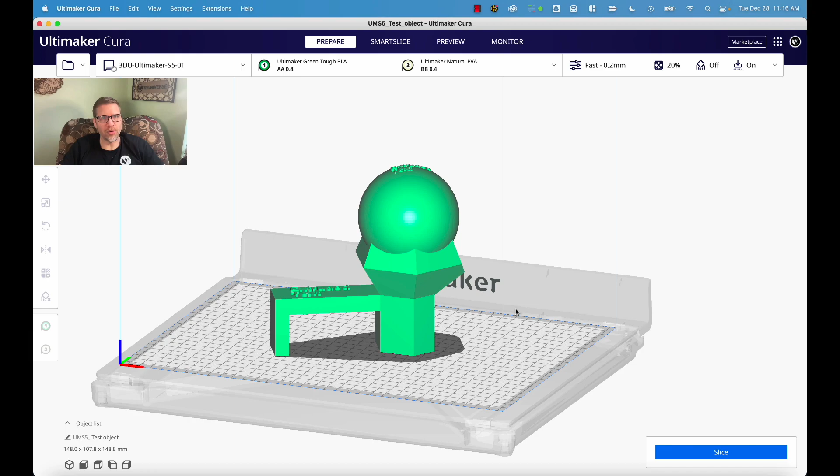I have here just a test object that I created real quick in Fusion, just so I could show some of these features. Just got different types of geometry here with some different sorts of overhangs, some flat surfaces, curved surfaces, some bridging, some extruded text, just stuff that'll show how some of these different settings can be used.

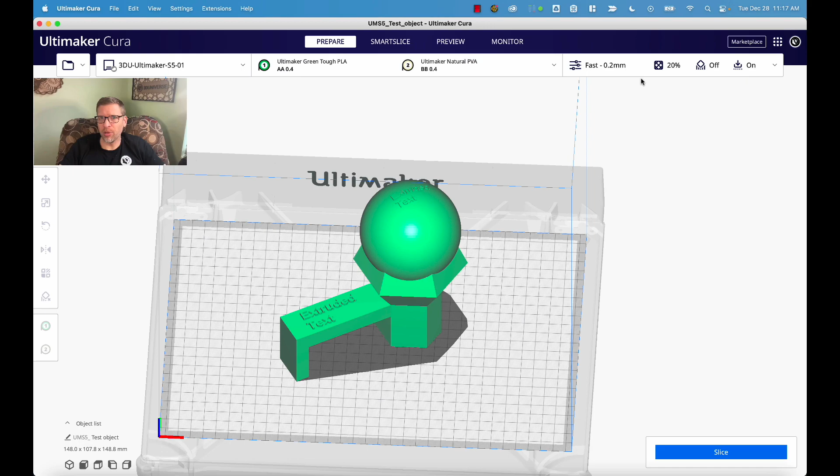So let's start with just some defaults. I've got this set up here for an Ultimaker S5 using 0.4 millimeter print cores, just using Tough PLA. And I'm going to start with just basic settings. So we'll slice just using the recommended mode, 0.2 millimeter layers, 20% infill. Don't need bed adhesion options here. Let's go ahead and just slice with defaults.

And we get an estimated print time of 13 hours, 39 minutes, using 186 grams of material at a cost of about $12.38. Now, those of you who have used Ultimaker printers already know that they err on the side of quality as opposed to speed with their settings by default. So there's a lot you can do to optimize things and get things to print more quickly without losing a whole lot on the quality side. And we're going to look at some of that here.

Now, let's say in this case we're more interested in speed than quality. There's always a sort of trade-off between the two, and there's no one right answer in terms of how to slice any given object. It's always a matter of finding the settings that most closely match what you're looking for, and it's going to be somewhere on that spectrum between the maximum speed and the maximum quality, depending on which of those is more important to you for a given print.

So in this case, let's say that we're more interested in speed than quality. And so the first thing that I would do is go to a larger nozzle. A larger nozzle is going to let you print things more quickly using thicker layers and wider lines, but it comes at the expense of quality, of being able to do finer details in your prints. So it depends on the specifics of your object.

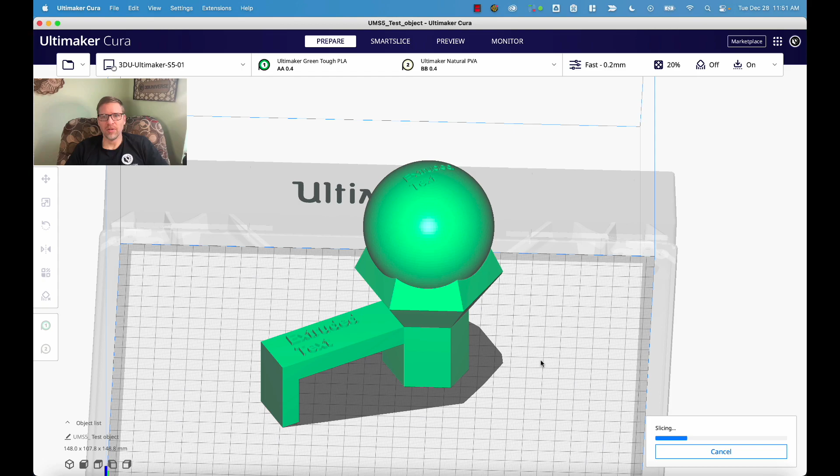Let's go ahead and slice this to give an example. So this is using a 0.4 millimeter nozzle. And if we go to the preview mode here, and we set our color scheme to material color, we'll see that everything looks nice, prints nicely, including that extruded text on top there. No problems at all. And that is where you'll see a difference.

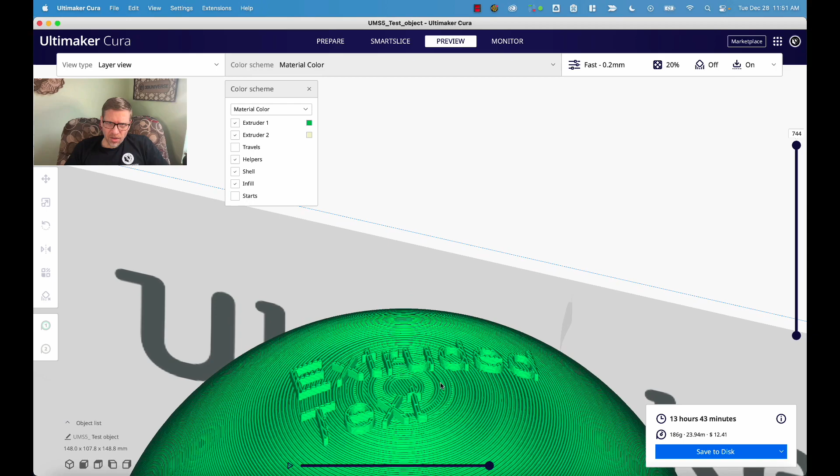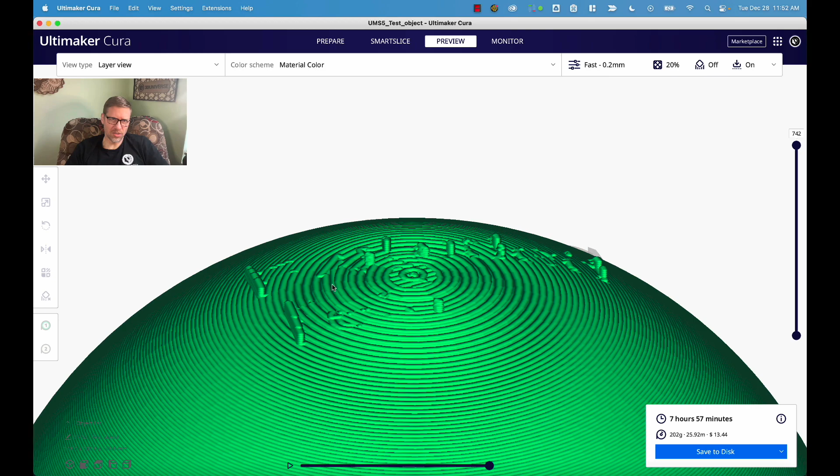If I change now to a 0.8 millimeter nozzle and reslice and go to preview mode, you'll see that that top extruded text really kind of falls apart. It just is too thin for the nozzle to be able to extrude those lines because the lines of the text are thinner than the 0.8 millimeter nozzle that we're using.

Now you could adjust your line width to try to get it to print those sorts of details, but that's not the ideal approach. Down here you can see that it is printing this text okay because that's a larger, thicker text, and it was able to handle that, but that text on top did not come through.

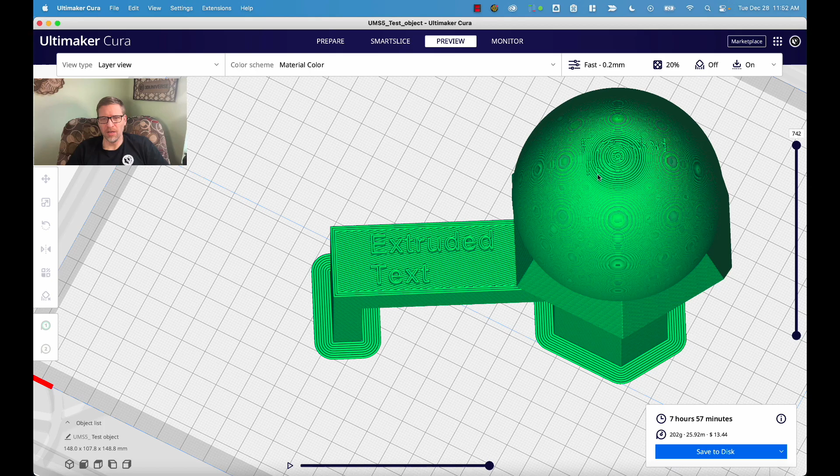So just be aware of that trade-off, that you will lose some of the very fine details where it comes to things sticking up out of your object that need to be extruded by the width of the nozzle. If you increase your nozzle size, you do two things. Number one, you increase the line width, which is going to speed up each individual layer, and you can also increase the layer thickness, which is going to reduce the number of layers that need to be printed. As a general rule, your layer thickness can be up to about 75% of your nozzle diameter. That's not a hard and fast rule.

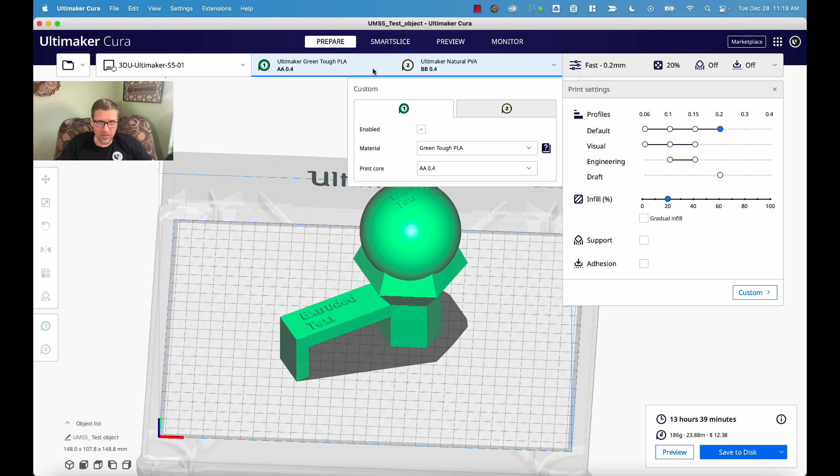You can go thicker even by increasing your temperature to get a better flow rate, things like that. But as a general rule, let's say 75% of nozzle diameter. So with a 0.4 millimeter nozzle, our layers can be up to about 0.3 millimeters thick. If I change that to a 0.8 millimeter nozzle, now our layers can be up to 0.6 millimeters thick, and we have half as many layers. We also have wider lines, so that means each layer can be done more quickly.

So let's go ahead and do that. Let's change it to a 0.8 millimeter nozzle, and let's start to customize some of our other settings here. But before I do that, I'll just reslice, changing nothing but the nozzle size. And already we see that our estimated print time is down to 7 hours, 57 minutes. So it's a significant time savings already.

But let's go further. I'm going to go into the custom mode now. This is where most of you will be working if you're more advanced with settings. This is where you can really get full control. Now, by the way, I should mention I've got all settings being shown here. If you're not seeing this, right up here, this little hamburger icon lets you select what you're seeing in settings visibility. Basic is just going to show the basic settings. Advanced shows more. Expert shows even more. And all, which I'm looking at here, shows everything.

If you want, you can go into Manage Setting Visibility, and that's where you can really fine-tune which settings are showing, and you can show or hide each individual setting to your liking. For right now, I've got all of them turned on. First thing I'll do is change the layer height. Let's go up to a thicker layer. I'm going to go to 0.35 here.

And there's a reason that I'm going to that. I could go even a little thicker. Like I said, I could go up to 0.6, but I'm setting it at kind of a midpoint because of a feature I'm going to show you shortly called adaptive layers. I'll explain that shortly, but for right now, I'll set the layer height at 0.35. And let's just slice again to see what that does using a layer height of 0.35 throughout. And you can see that already reduced our time further down to 4 hours, 59 minutes.

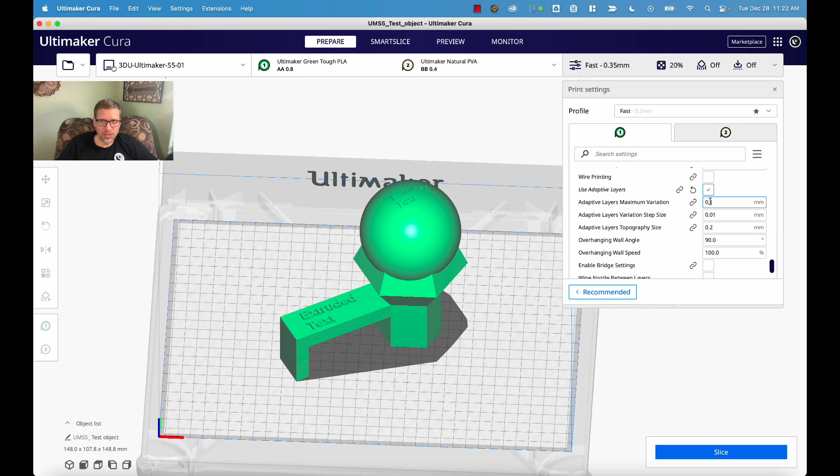Adaptive layers maximum variation means how much you can vary the layer height either up or down from your base layer height. So if you recall, we set our base layer height to 0.35 millimeters. What I'm going to do is set this value to 0.25, and what that means is the layer height will be allowed to vary up to 0.6 millimeters and down to 0.1 millimeters because it can go 0.25 millimeters in either direction from what I have set as the base layer height. The next setting is adaptive layers variation step size.

So from each layer to the next, this specifies how much the layer height can change. Now, currently it's set to 0.01, which means it's only going to change each layer by 0.01 millimeters. I want to let it change a little bit more quickly than that, so I'm going to go to 0.05 here. That means it can go from 0.25 millimeters on one layer, it can go to 0.3 millimeters on the next, and then 0.35 millimeters on the one after that, and so on.

The third setting here is adaptive layers topography size. What this means is how much distance is there from the edge of one layer to the edge of the next layer. So think about a slanting surface where the layers become more visible. How close do you want the edges of each layer to be? That's going to determine how thin the layers need to get in order to achieve that setting.

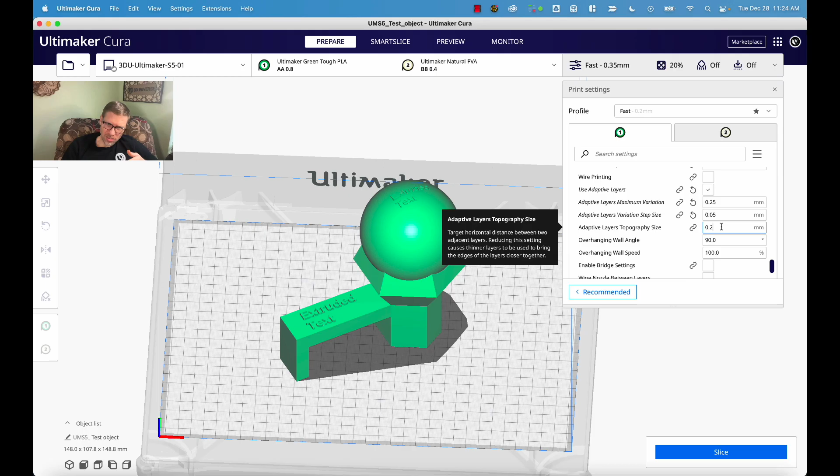So by having it set at 0.2 millimeters, that means that the very edge of one layer, like if we looked at these slanted surfaces here, the very edge of one of these layers can be 0.2 millimeters away from the edge of the next layer. So I'm going to leave it at that for now, and we'll move on. So those are the 3 settings for adaptive layers.

Okay, so another setting that we have here is overhanging wall angle and speed. What this is useful for is slowing down the print speed on areas where there are overhangs. Like if you look at these slanted surfaces here, you're going to get a cleaner surface if you go a little bit slower on those overhanging walls. And so what we can do is specify an angle and a speed reduction for that. So there's 2 settings here.

The first one is the overhanging wall angle. And what this means is any walls that are overhanging more than this angle are going to be treated as overhanging walls. The default is 90 degrees. Now, it's impossible to overhang more than 90 degrees. So what that basically is doing is disabling this setting. Okay, if you have a 90-degree overhang, that means you have a horizontal surface and you can't get any more than that.

So if I reduce this to, say, 20 degrees, that now means that any wall that's overhanging more than 20 degrees, which would include all of these slanted surfaces here, those are going to be treated as overhanging walls. And this next setting will then apply. So let's say that we want to reduce those by half, so we'll make this setting 50%. Now that means that any of these overhangs that are more than 20-degree overhangs are going to be printed at half of the speed of the rest of the print.

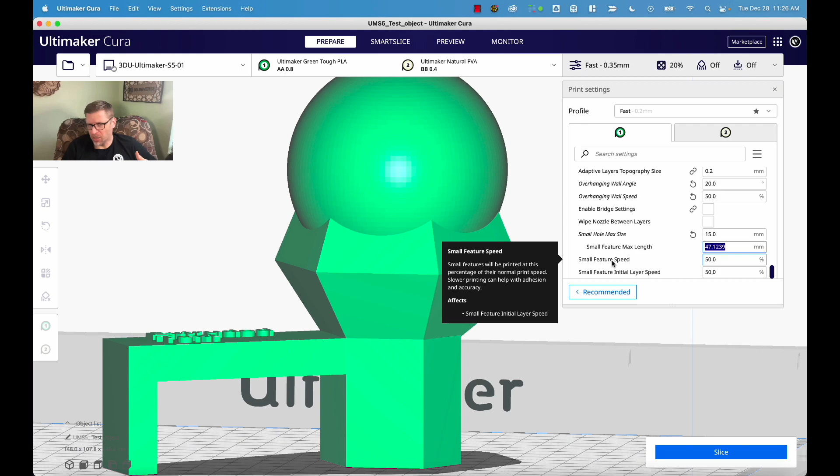Moving on down here, another one that you'll want to be aware of is this small feature set of settings here. So small hole max size is basically the size of a feature that's considered small. So anything less than this size is going to be considered a small feature. So let's say small holes of less than, I'm going to go 15 millimeters here, so that anything that's even remotely small is going to result in these settings down here being applied, which is again a reduction in speed. Small feature speed, 50%. Small feature initial layer speed, also 50%. I'm just going to leave those the way they are, and we can see what that does here.

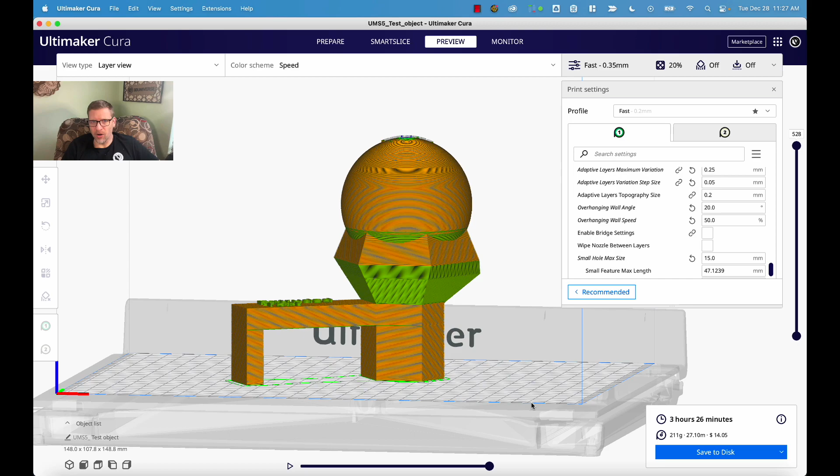I'm going to go ahead and slice with these settings and see what we have here. And I'm going to go back into our preview mode here so that we can see what's going on. Right now, I'm using the speed color scheme, which is very helpful for seeing how our speed is changing throughout the print. And what you're seeing is a couple of things. Let's scroll down through our layers here, all the way down to layer 1.

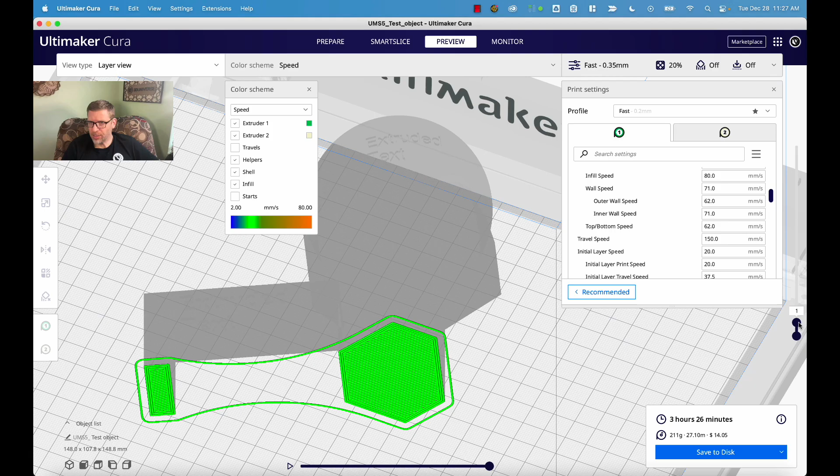Starting at layer 1, we've got this bright green color, which looks like it's a rather slow speed. Okay, well that's, if we scroll up to our speed settings here, that's because our initial layer speed is 20 millimeters per second. That's to be expected. As we keep going there, we've got this orange color, which is our maximum print speed of 80 millimeters per second.

But then if we scroll up further, we see some different speeds. Number one, the lettering. Okay, why is that lettering going slower? Well, because of that small feature setting that we used way down under experimental. If we turn off that feature setting there, we go back to 0 for the small feature size and we reslice, you're going to see that that extruded text is back to orange.

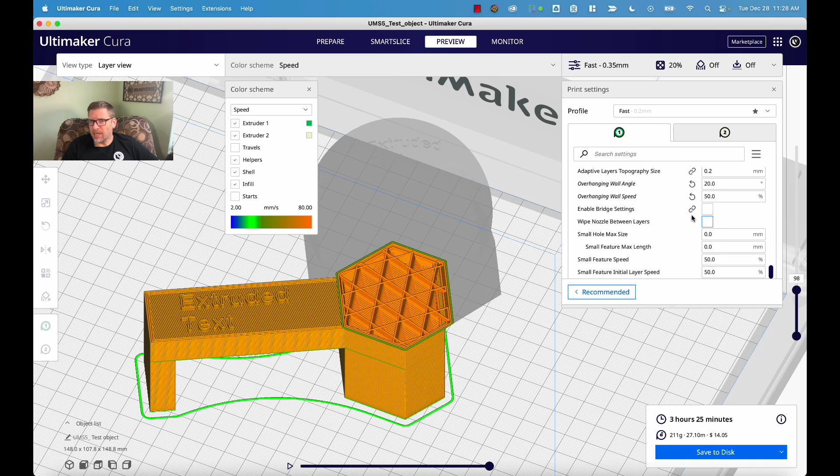So it's trying to print that at the maximum speed. And it's probably going to look a little bit sloppy as a result. So that's what that small feature setting is doing. I'm going to put it back to 15 millimeter max hole size. And then those settings should be reapplied. If I slice now again, you'll see that that text is now in a green, which means that it's printing at half speed, about 40 millimeters per second.

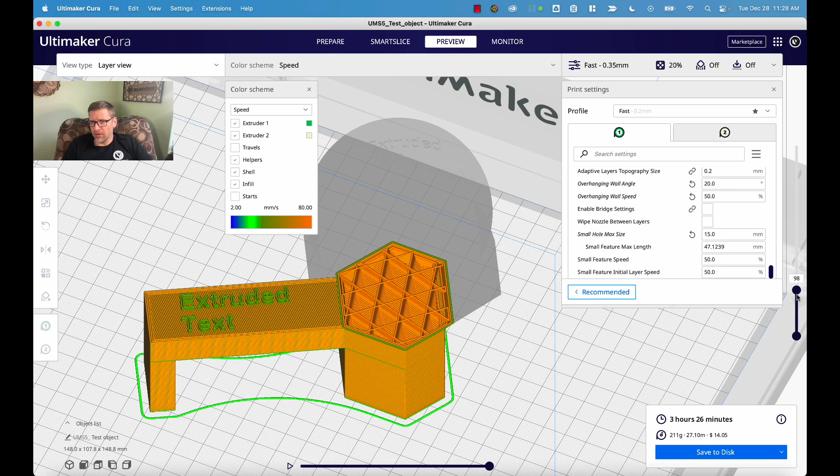Scrolling up through some of these other layers, you're going to see that the same thing is being done with our walls here, the slanted walls, and that's because of these overhang settings we had here. Those walls are more than a 20-degree overhang, and therefore they're being considered overhanging walls, and they're being printed at 50% speed. But that only affects the walls, so the interior is still being printed at 80 millimeters per second.

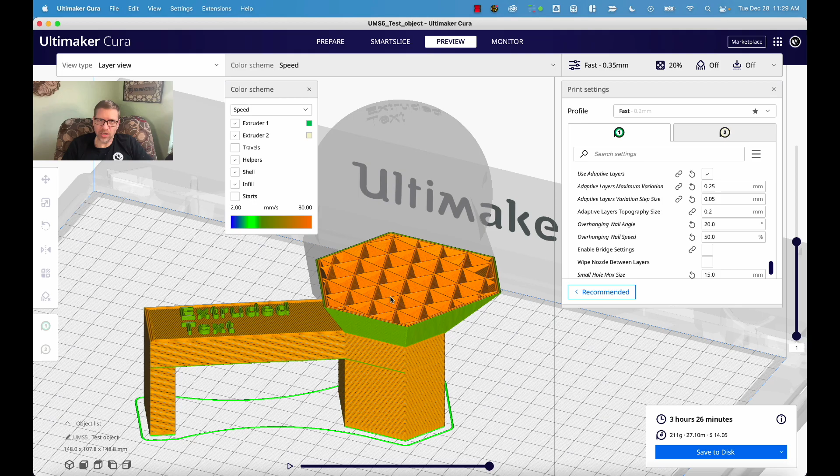Now, keep going. You're going to see that similarly, the curved surface down here at the bottom had those overhang settings applied. There's a little bit of an outward overhang there, so that got slowed down. And then way at the tippy top of the print, the last couple of layers got slowed down just because of the minimum layer time setting. It's trying to not print those layers too quickly. It needs to give the material time to cool, so it's slowed down for that.

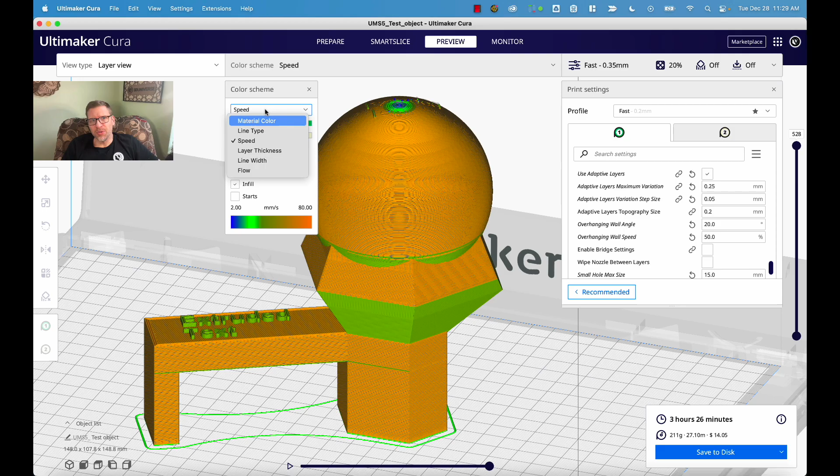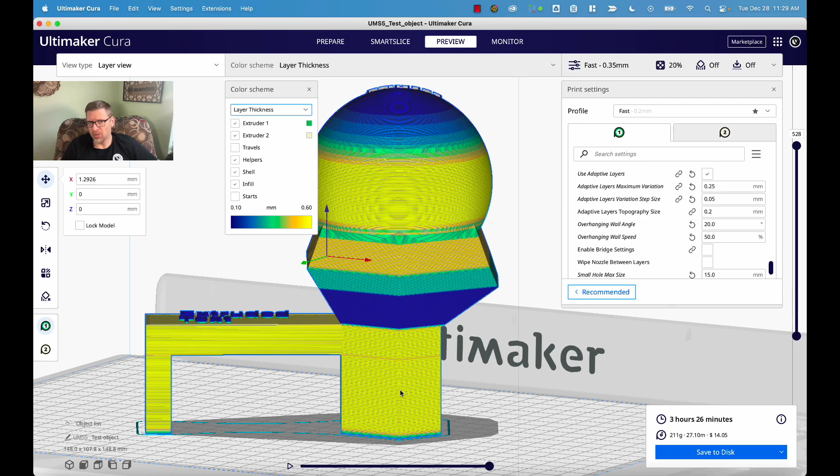Now, let's change to layer thickness in our color scheme view here. And now we see something interesting. We see that the layer thickness is changing throughout the print. And that's because of our adaptive layer settings. So what we see is down here at the bottom, where it's pretty flat walls, there's nothing fancy happening, it's doing the thickest layers possible. The yellow there is 0.6 millimeters. So we're getting the best speed that we can because you're not going to see those layers much anyway because they're being stacked right on top of each other neatly.

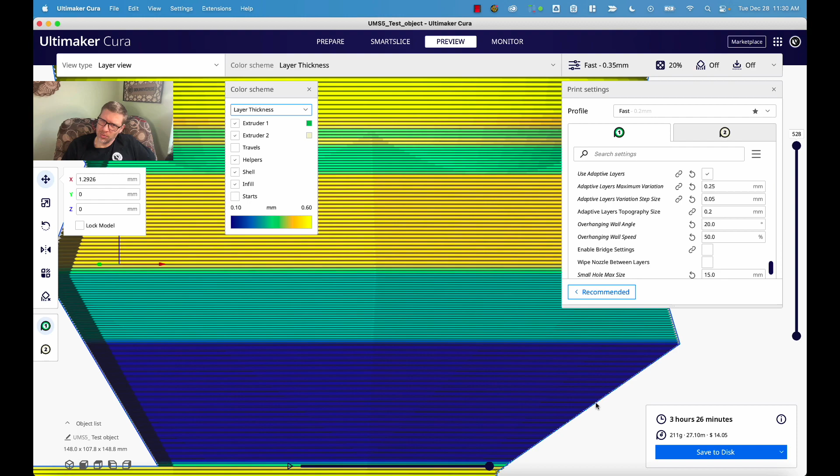But then when we get into this area where you have the slanted overhangs, it pulls way back on the layer height, goes all the way down to 0.1 millimeters, so it's using the thinnest layers possible, and that's because of this overhang over here where it's really got a steep outward overhang, and it wants to give us the smallest sort of step size possible, and so it's using 0.1 millimeter layers.

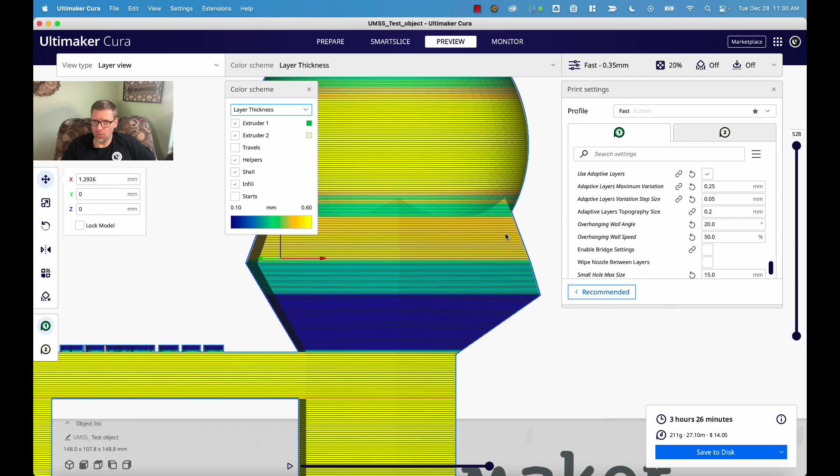Then once it gets past that steep outward overhang, this part in here, it's still got overhangs, but they're not as steep, so it's going with this middle kind of 0.4 or so millimeter layer height. And then as you can see past that in the yellow, it goes back to thicker layers because there's no more overhangs. And so it's adjusting this throughout the print as needed.

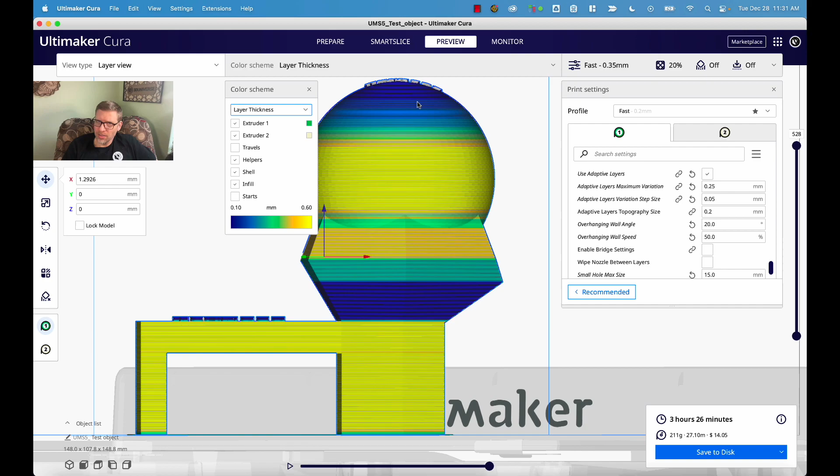When it gets into the spherical part, the middle section here, it's using real thick layers because there's not much curvature there. And then as soon as that curvature starts to increase, you can see that it gradually reduces the layer thickness, getting thinner and thinner and thinner, so that you get the best quality possible where you need it, and thicker layers where you don't need that, where it's not going to be visible. So this really gives us a nice trade-off, and you can see that our print time now is down to 3 hours, 26 minutes. So you're getting a really nice balance between speed and quality in this case.

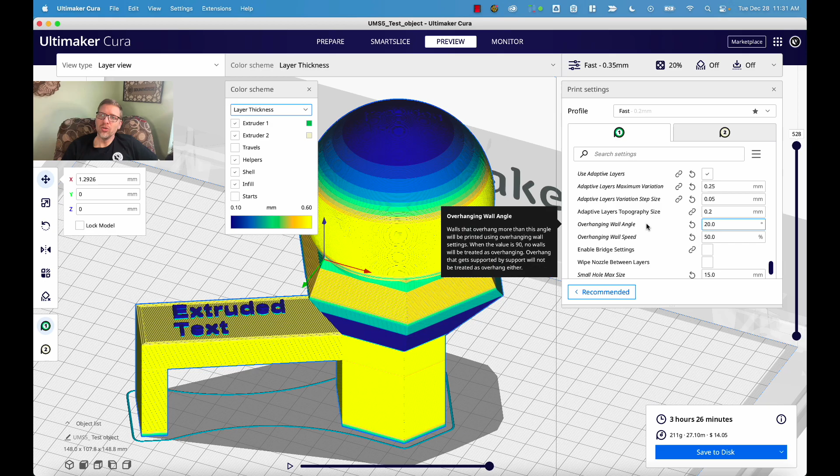And if you wanted to skew it more towards quality or more towards speed, you can do that by adjusting these settings. So you might adjust your adaptive layers settings here so that you skew it more towards thicker layers. You might adjust your base speed, go even higher than 80 for your base speed, and then pull it back from there where needed. There's a lot of things that you can do to sort of fine-tune things here, but those are the basics of how you can get control over your layer thickness and your print speeds using some of the settings that are available here.

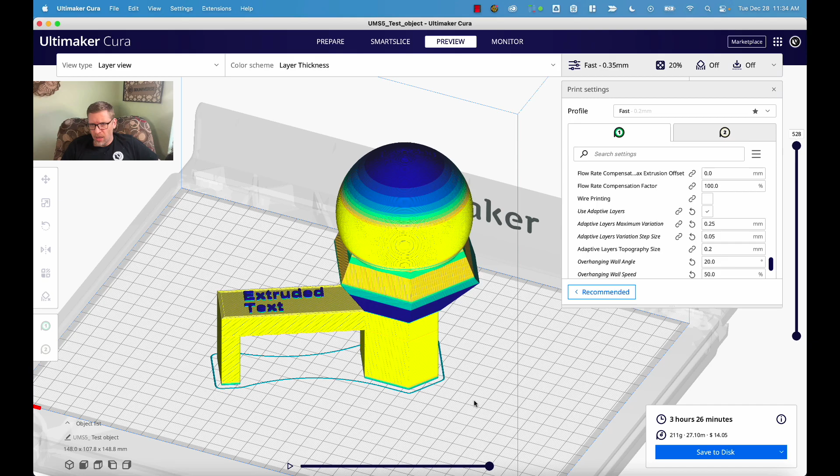All right, so now that we've gotten a pretty good print time on this print, there's something else I want to show you, and that is bridging. So if we look at this bridge that's being printed down here in the preview mode, we see something interesting. Look at how that bridge is being printed. Look at the direction of those layers. We can see it more easily if I scroll down to those.

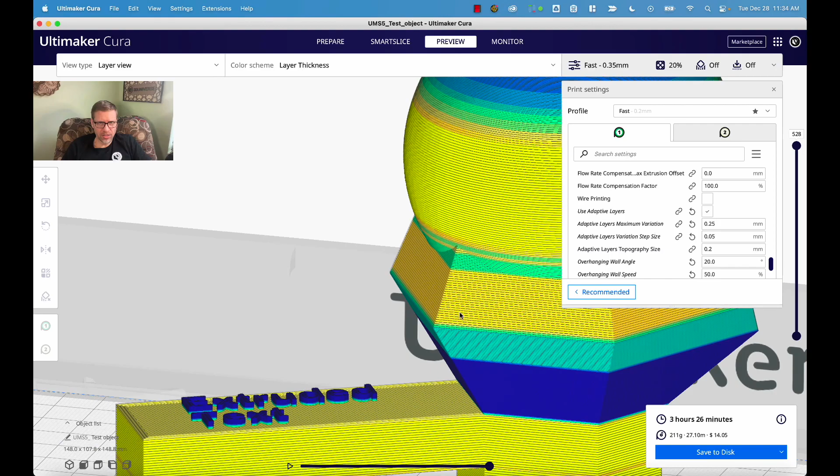I'm going to go back to a top view here, pan around a bit, and now let's scroll down to exactly that layer. Let's see, now that's layer 60, yep, layer 60 there. And then we can actually use this horizontal scroll bar to animate that layer. So look what's happening. It's going to try to draw the outer walls, which is going to be okay. It can bridge that gap. Okay, you're going to have those two strands there.

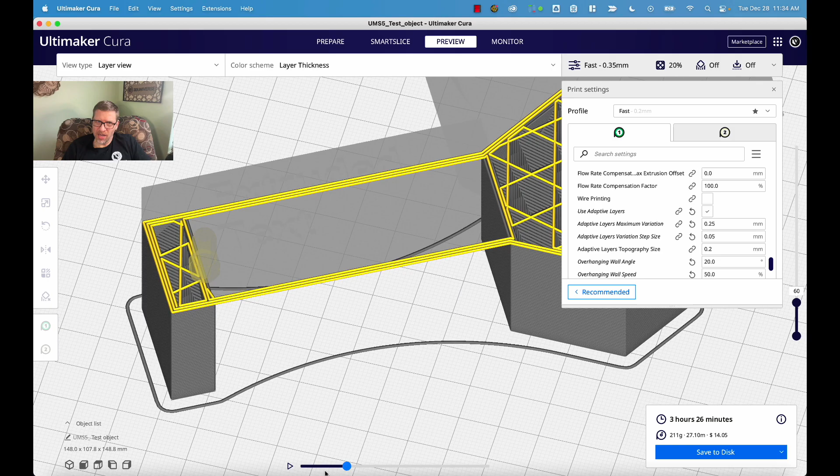But now it's going to try to print across those strands at this angle, and that is just not going to work very well. It's trying to sort of connect up at each end there, going back and forth, and you're going to end up with a very messy bottom surface doing it that way.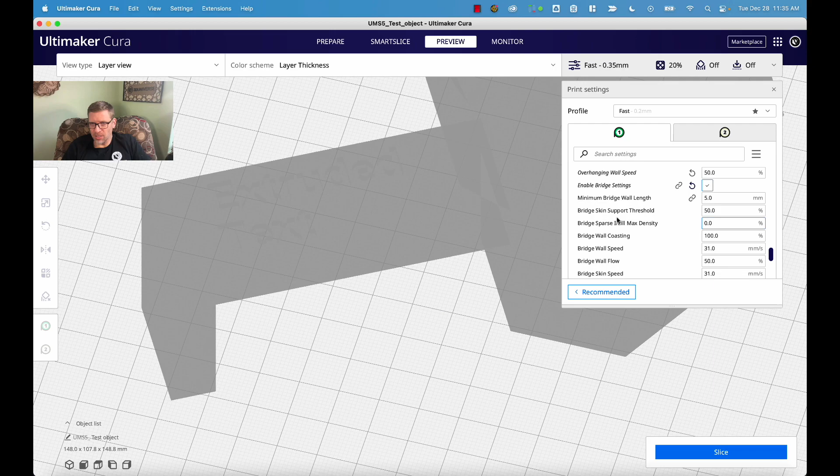If, however, under this experimental settings section, we enable the bridge detection, enable bridge settings here, I'm not going to mess with any of the settings down here because I found that the defaults work pretty well. You can tailor all these settings if you like, but I'm going to leave them on defaults. Just by doing that one thing, enabling bridge settings and reslicing,

look what happened. That exact same layer is now being printed the way we want it to be printed, going back and forth, connecting up at either end. We're going to get a nice clean bridge that way, and then building up from there, it's going to start going across and then alternating directions. And that's exactly what we want to see. You're going to get a much cleaner lower surface on that bridge.

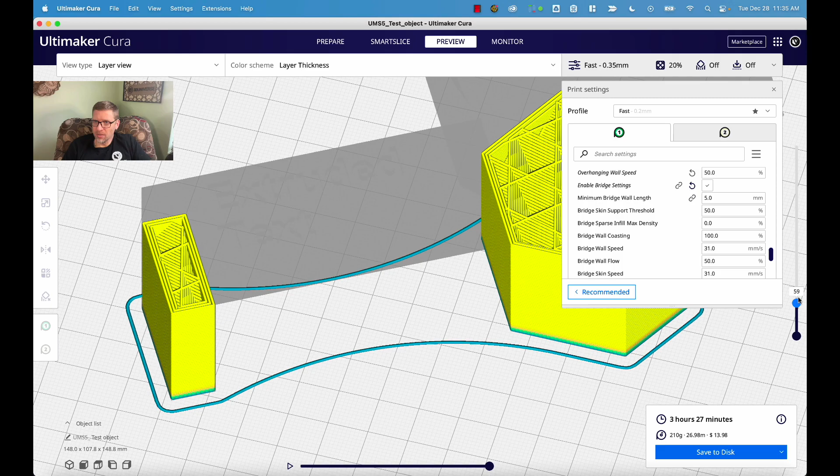I'll go back up to layer 60 here. There we go. So that's going to give us a much nicer result on a bridge. So if you have areas of your print that you know are best handled with bridging, enable that here under experimental settings and you'll get a much nicer result.

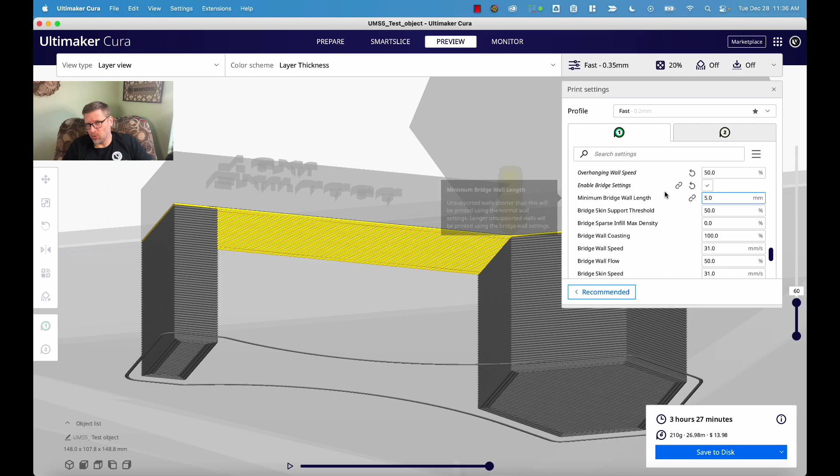Okay, so now we've got a pretty good set of settings here. We've got our print time down to just under 3.5 hours, but let's say I want to customize things further. Maybe there's certain things that I want to do in parts of my object that are different than other parts of the object, and you can't do that using the global settings over here so well. Well, you've got two other very powerful tool sets at your disposal in Cura, and I'll show you those here.

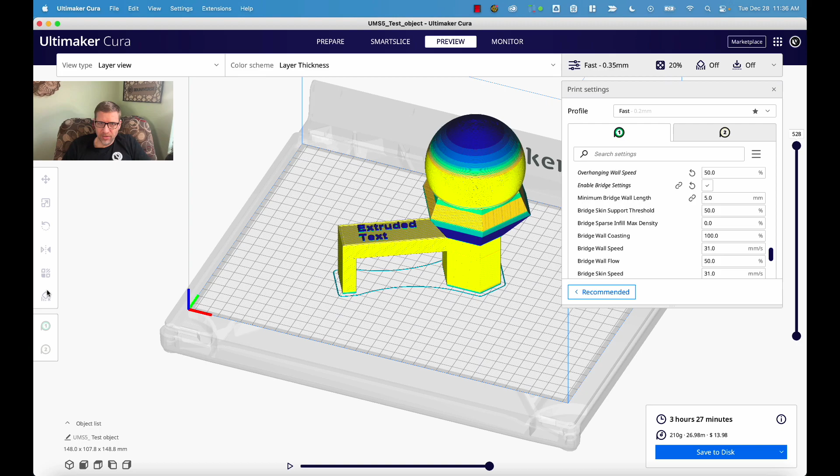Number one is something that's based off of the support blocker tool. So let me go back to prepare mode here, and you have to select your object first. Notice that you don't get these tools until you have an object selected. So select our object. Now I go over here in the toolbar, and I'm going to select this support blocker here. Now, usually this is used for blocking supports, just as the name suggests.

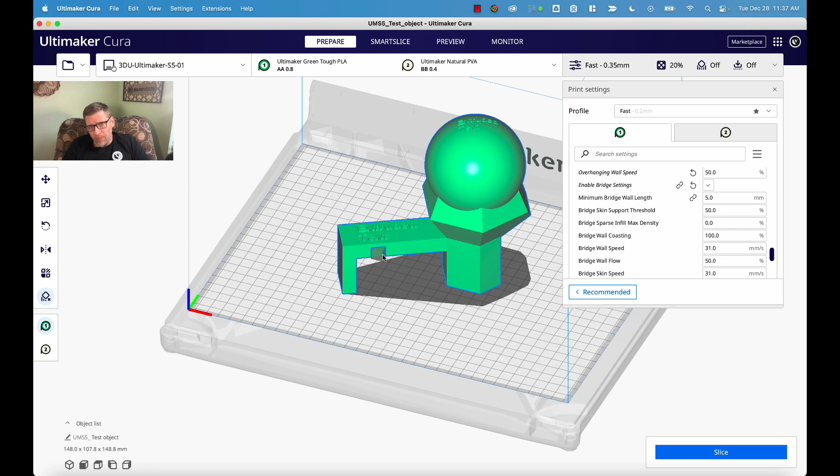So if I drop this in here just by clicking somewhere in my object, that just drops a little cube there, which I then have to manipulate by first deselecting my object. Because right now you might notice that both my object and the support blocker are selected. So let's just click out here to deselect everything.

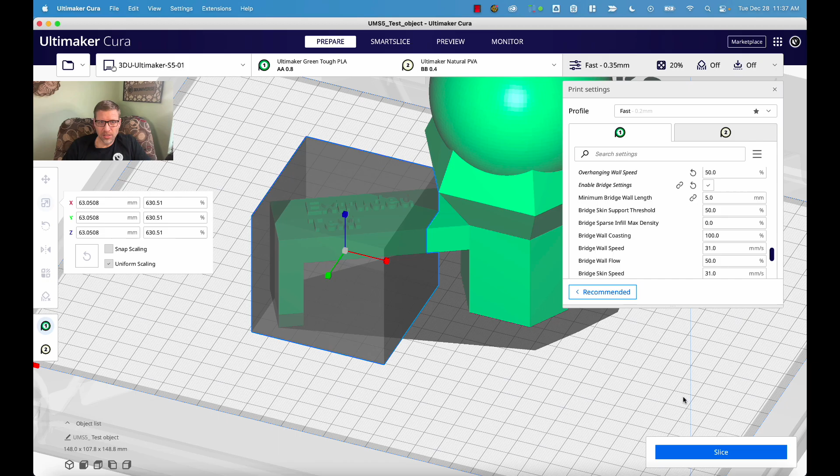And now if I click back on that support blocker just to select it, I can now manipulate that object just like anything else. So let's scale it, make it bigger so I can actually do something with it. Maybe we'll rotate it a bit so that it's oriented like this part of the object. We can move it around. Let's put it so that it's just kind of overlapping this end here.

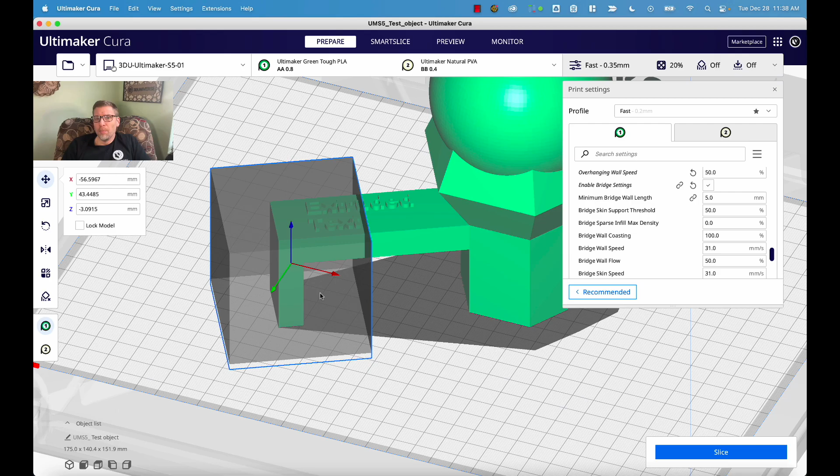And so by default, this object would do just as the name suggests. It would block supports. So if I enabled supports for this print here, we'll do that now just so you can see. We'll go ahead and turn on supports. And we'll slice.

And if we go to preview mode, you'll see that we now have supports under there, but we don't have supports under here because of the support blocker. Okay, so that's how the support blocker works. But we can also use that support blocker in different ways. So I'm going to turn off supports, so we don't need them for this print.

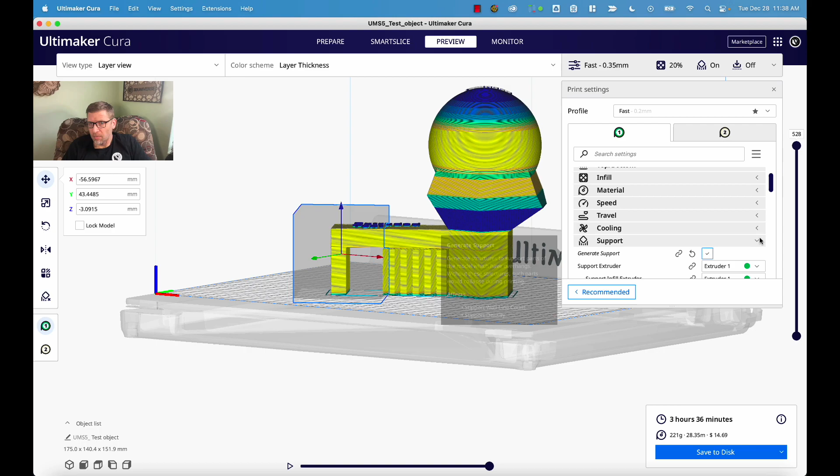And now we can go back to that support blocker object. And over here on the toolbar, the next one up is called Per Model Settings. And if you click on that, you'll see that it's defaulting to Don't Support Overlaps, which is what gives it that support blocking function. But you can change that to say Modify Settings for Overlaps, Print as Support, or Normal Model.

So normal model would just mean that you're going to print it as a model. It's going to print solid. We don't want that. Print as support means that that whole area will get printed in as support, which also is not very useful in my mind. But this one here is quite useful, this one that says modify settings for overlaps. That lets you modify that region of your printed object that overlaps with this.

And you can only modify certain settings this way, but there are quite a few. So you can modify the infill mesh only, which is only going to modify the interior of your object. Or you can choose cutting mesh, which is going to modify everything that is overlapped, including the walls and the interior. So choose one of those options, and then you can select your settings. Now, not all of the settings are available here, but quite a few are.

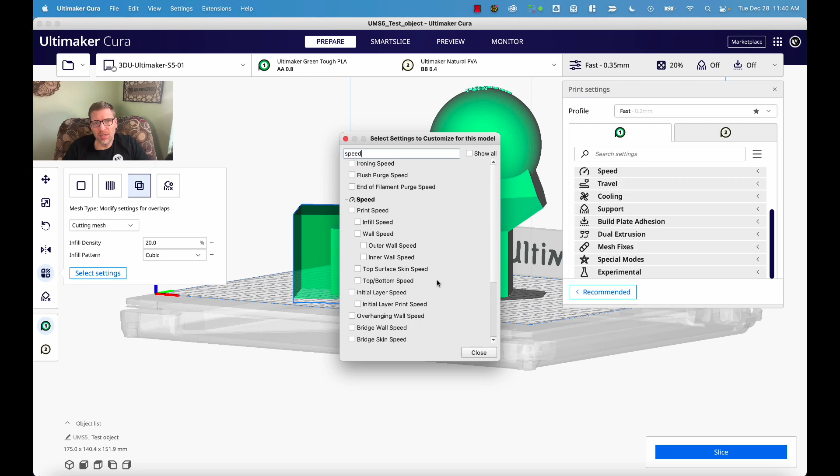So for example, you can change your, let's see, infill. Maybe I want to have more infill. Sometimes it's hard to find. You can just type up here, infill density. Maybe I want to change the infill pattern too. Maybe I want to change the speed for the walls. A lot of different settings you can change. So choose the ones that you want.

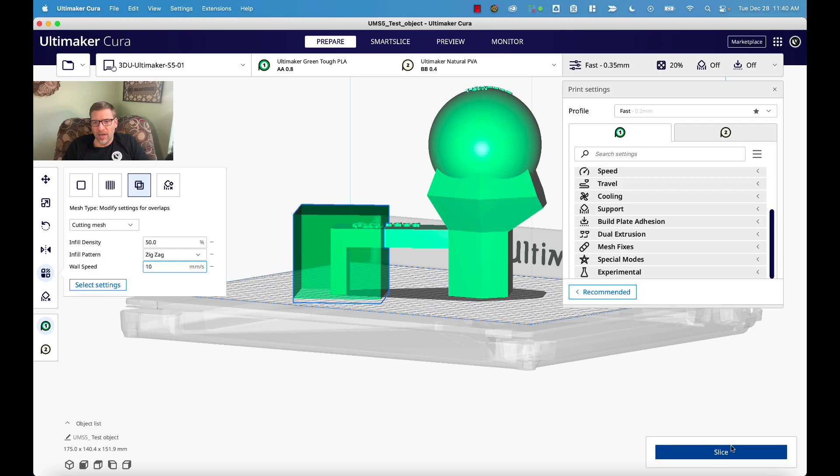And let's say over here, infill density, instead of 20%, I want 50% infill for this region. And let's change it from cubic to, oh, I don't know, we'll do zigzag infill pattern. And let's say we want the walls to go really slow here, all the way down to 10 millimeters per second. And now if I slice and preview, what you're going to see when we scroll down through those parts of the layers, let's change our color scheme to speeds.

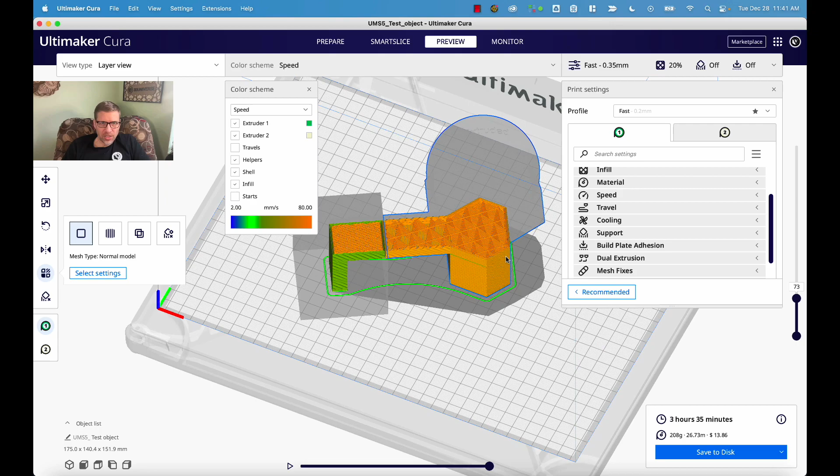So you can immediately see that that whole section over there, the walls, are being printed much more slowly. If I scroll down a little bit more, you'll see that. So the interior is still being printed at the full 80 millimeters per second, but those walls are cut way back based upon the settings that we specified for that custom region.

The other thing that you can see is the infill density. Notice that that is a much denser infill. That's a 50% infill compared to 20% everywhere else. So it is modifying those settings that we specified only for that area, and that is a very powerful way of customizing different parts of your prints.

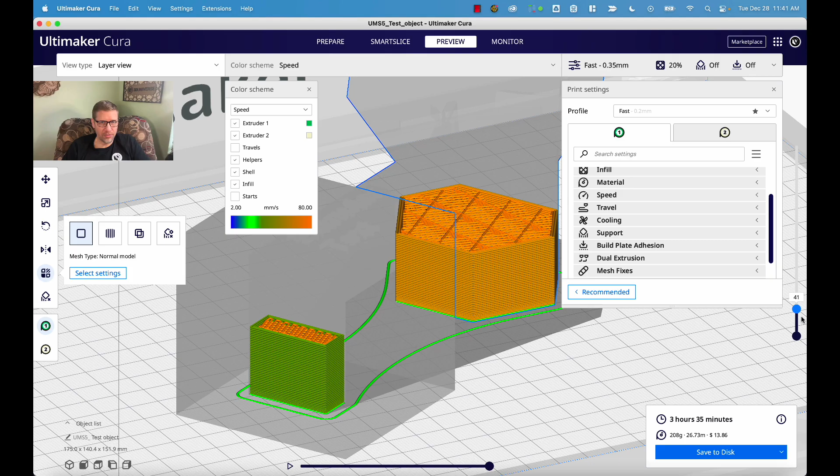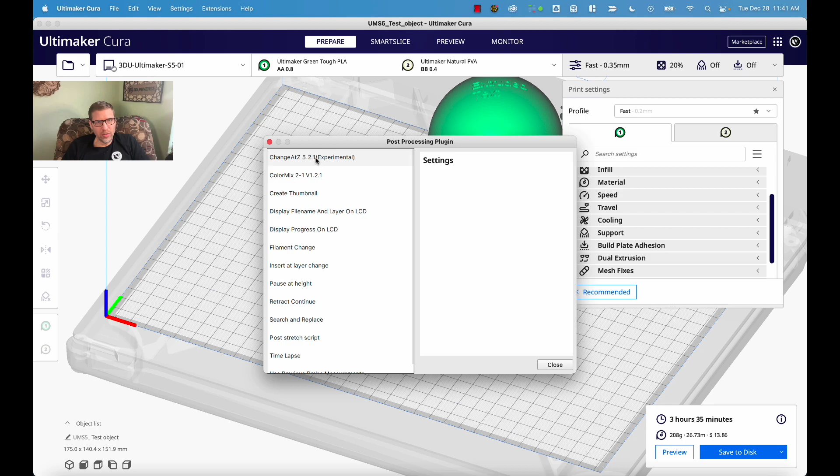Another option that you have is something that you'll find under the Extensions menu, Post-Processing, Modify G-Code. And what you can do here is add a script, and there are a number of options here, several of which are quite useful, but I'm only going to show you this one here, ChangeAtZ. And what this does is it allows you to change certain settings at specific heights of your print. So you simply specify a height, let's say 10 millimeters, and you can change these settings at that height.

Now there's a much more limited set of settings available in this tool, but you might find that there are some things you can do here that you cannot do using the support blocker customization approach that I showed before. For example, changing retraction settings at a certain height. Maybe you want to change the amount of retraction or the speed of retraction. That's something that you actually don't have the option to do using that other method. So there are some things that you can do in this tool that you cannot do there.

And so these are the two methods that you can look to control settings within different regions of a print differently from one another.